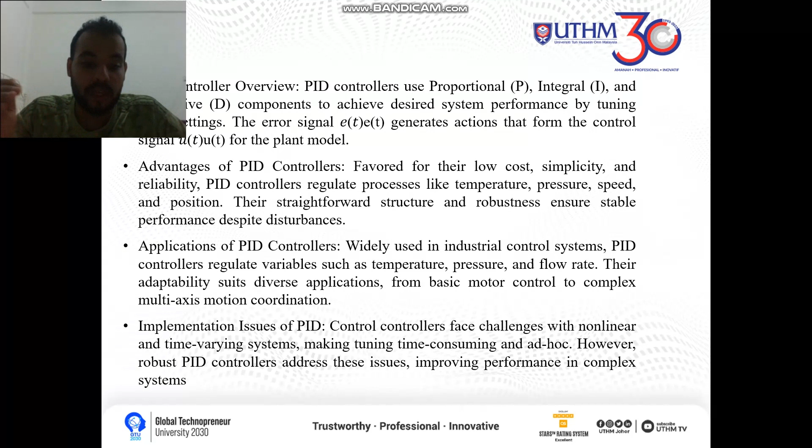Here is Bashar Mustafa Ali Muhammad Ahmed, matric AA200076. I'm going to present the methodology and the calculation. So firstly, for the methodology of our project, first we need to find the parameters, which are K, tau and theta. Then we measure the error.

Then we need to derive the system transfer function, using the FOPDT. And then we measure the error, and then we design the PID controller using Ziegler-Nichols. Then we check the error, and then we find the transient and steady state analysis of the PID controller, and then we check the error.

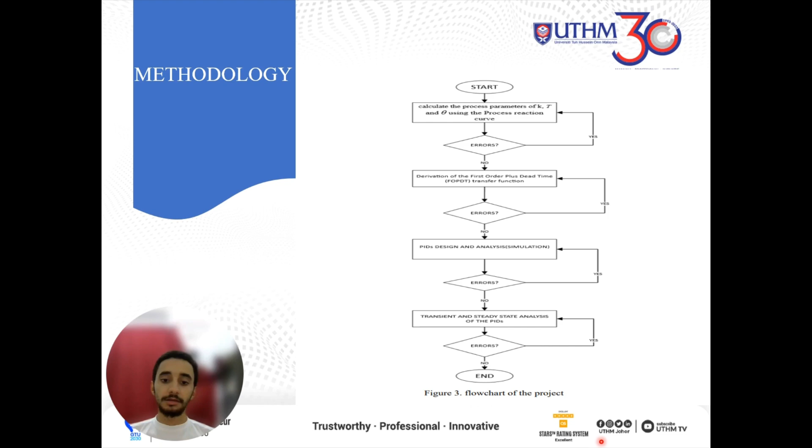So next, for the calculation, firstly, here is the system response graph. First we need to find the system scale for X and Y. X is time in seconds, and Y is the temperature in Celsius. For each millimeter we have 2.78 Celsius, and for each millimeter we have 25 seconds. So first, we need to find the S, which is the whole system response.

We find it as 230.58 Celsius. And then we find the M, which is the initial condition, 27. And the A, which is from the initial condition to the S, is 203.58 Celsius. The B is 5 volts. And the theta, which is the delay, is 175 seconds, from here.

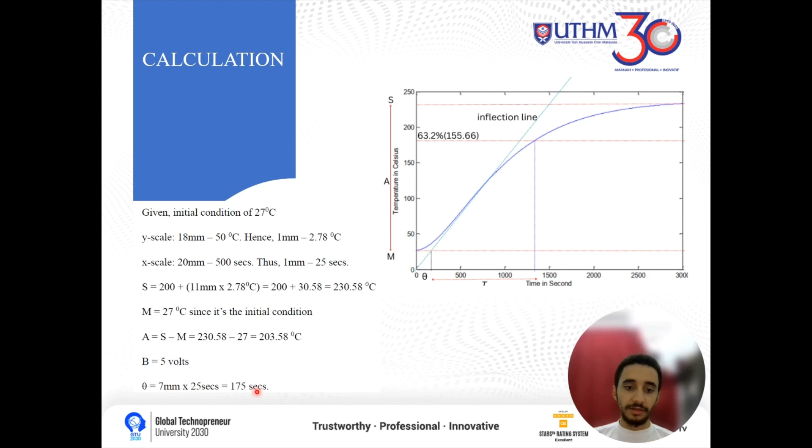Then we calculate the tau. First, we need to measure 63.2% of the system, the A, plus the initial condition. So after we find the tau, which is 1350 seconds, we can calculate the K, which is the gain: A over B, 40.72.

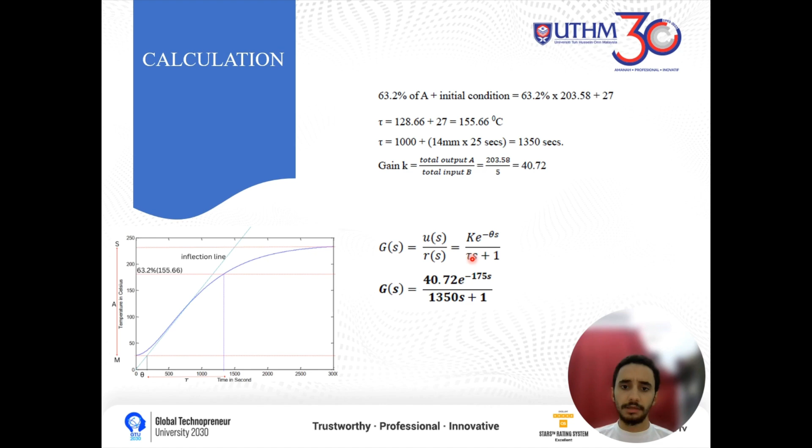Then we do the transfer function of the system. We just substitute the parameters we got here, which are the K, the gain, the tau, and the theta. So now we need to design the PID controller using Ziegler-Nichols. We need to do the calculation first. From the table, we can calculate the KP, the TI and the TD.

For the PID, first we calculate the KP, which is 1.2 multiplied by tau over K theta. So we find 0.227. Then for the TI, which is 2 multiplied by theta, so 2 multiplied by 175, we get 350 seconds. And for the TD, we multiply 0.5 by theta, so we get 87.5 seconds.

Now we need to find the KI. KI is the KP over the TI. We already found the KP and the TI, so we just divide them, and then we get the KI. Then for the KD, after we find the TD and the KP, we can find the KD, which is 19.88875 s.

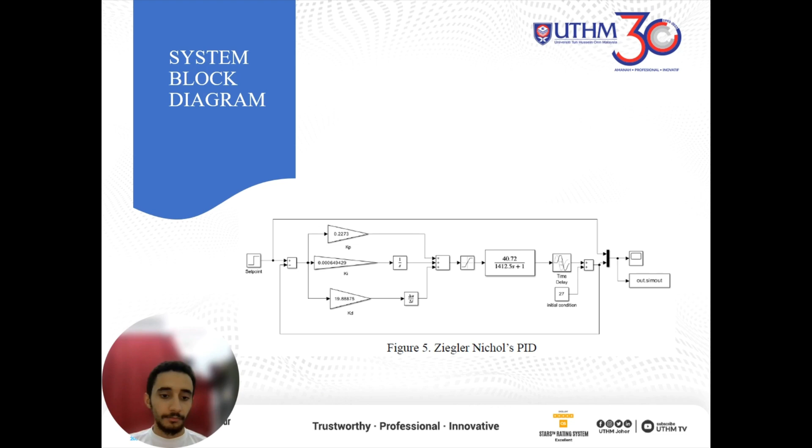So as we see here, here's the block diagram of the system, which is the Ziegler-Nichols PID controller. And here is the PID with back calculation anti-windup. So here is the block diagram of the system.

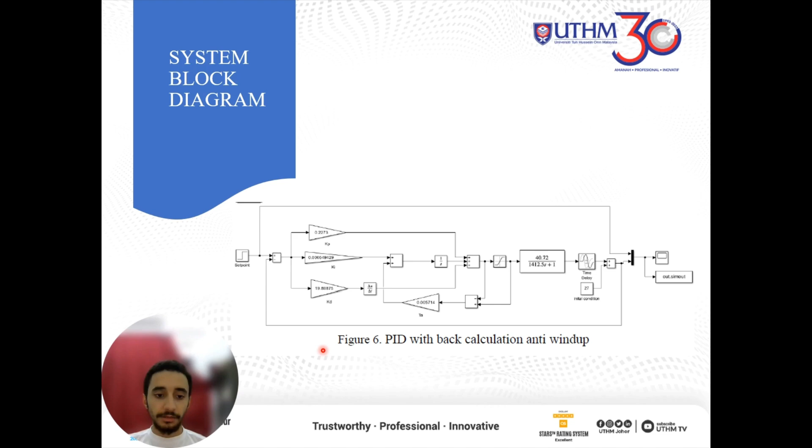This is our PCS project. Okay, so I'll be handling the results and analysis. We designed two PID controllers, which are the Ziegler-Nichols PID and the robust PID. So we analyzed both controllers using the steady state and transient analysis.

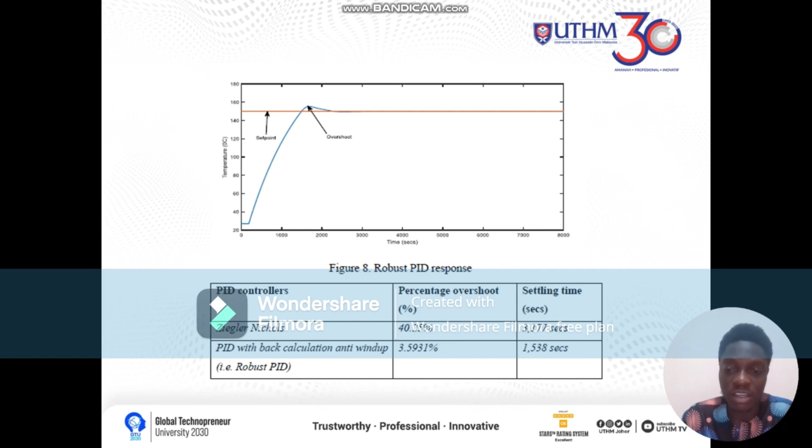And as regards the settling time as well, the robust PID was able to perform better too. It has a lesser settling time than the Ziegler-Nichols PID by almost half. So for the steady state analysis, we use the mean square error analysis. Here is the comparison between both controllers, Ziegler-Nichols and the robust PID.

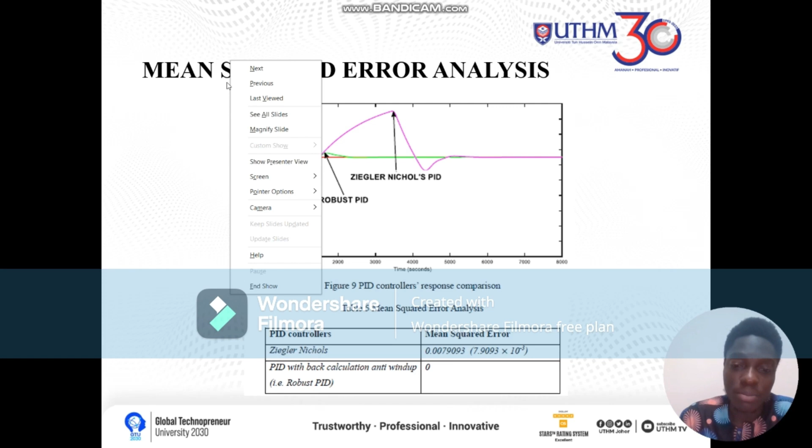After designing the controller, it was deduced that the Ziegler-Nichols PID couldn't meet the company's requirement. However, the robust PID was able to meet it. For the mean square error analysis, the robust PID was 0, and the Ziegler-Nichols PID was around 7.9 to the power of -3. And then I'll move to the simulation.

The PID was actually designed using MATLAB. I have calculated our parameters and everything. So here is the PID designed for 8,000 seconds that we used and ran. I'm going to run this to show you the response from earlier. So now I have clicked on run, and it's going to take a while for it to run.

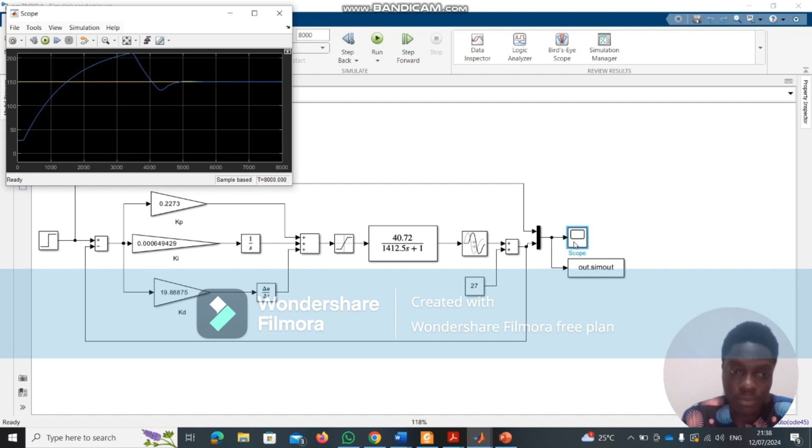Okay, so here are the gain parameters. Here is the set point, the saturation, and the transfer function of the plant. Here is the time delay, and this constant here is the initial condition. As you can see, the PID has run; from the scope, this is the response of the Ziegler-Nichols PID. Here is the time delay, and here is the percentage overshoot, and from here the settling time was calculated.

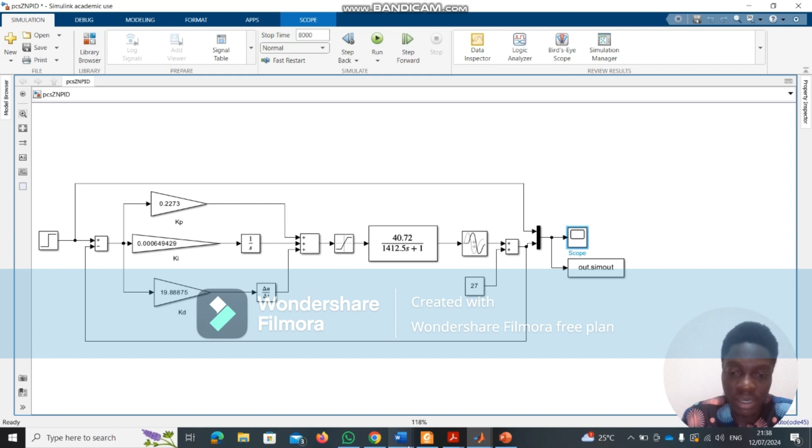So therefore, the project was successful, and we were able to design a robust PID to meet the company's requirements in terms of the overshoot and the settling time, as well as the mean square error, which can be summarized as the transient and the steady state analysis.